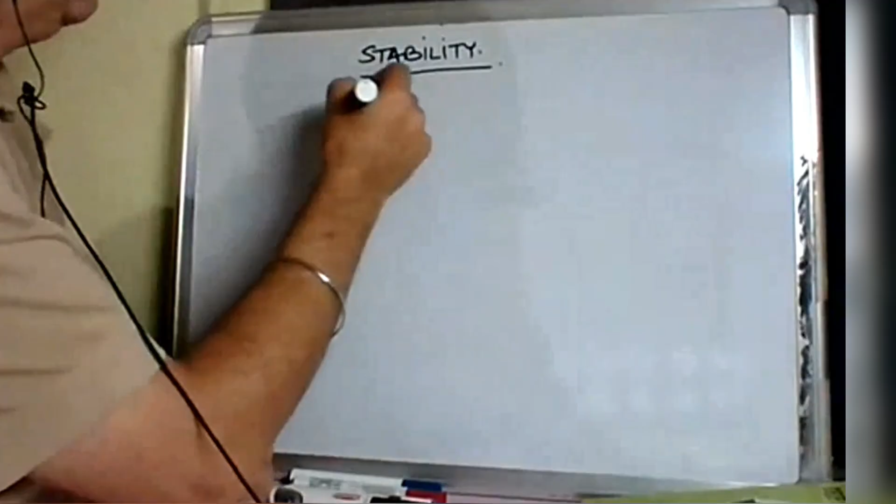These are the topics that I'll be doing with you. So the first big topic that we have will be dry docking, grounding, then trim A. This is from second mates, I'll revise it. Trim A, you will remember this from your second mates. Then we will be going on to Hinship question number 84. Specifically one question. This is a combined list and trim question. It's quite popular and definitely comes. So we'll be doing this. And trim table, trimming tables.

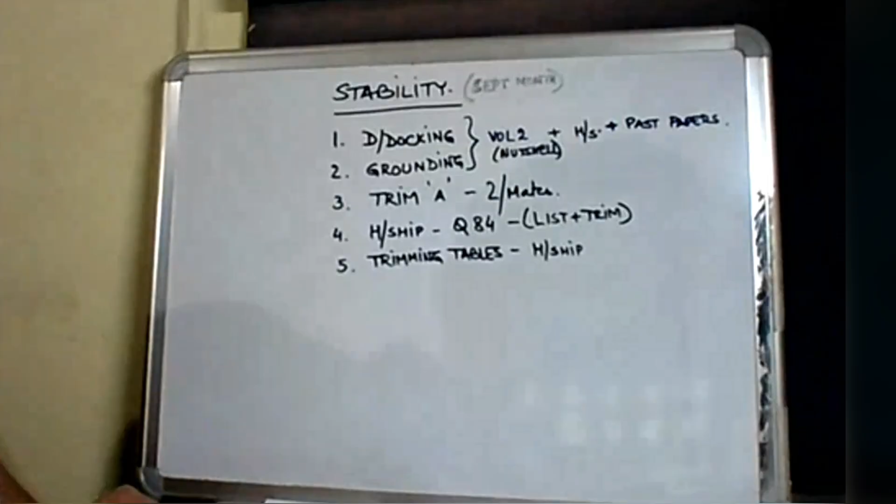All right, let's start with dry docking. So let's make a diagram.

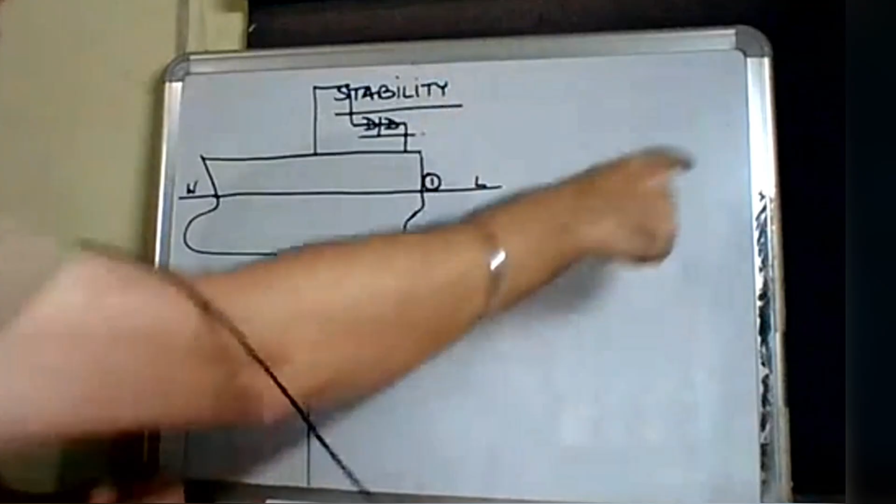Okay sir, we can proceed.

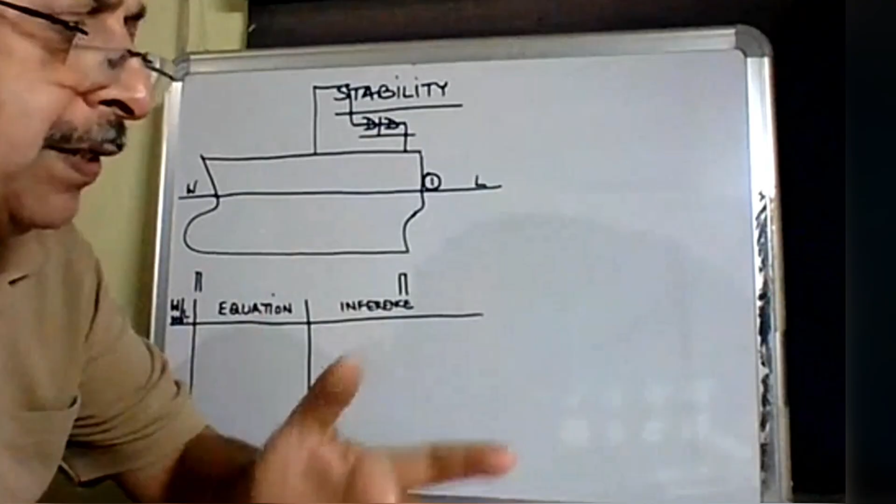Yes, okay. So this begins a good 6 months earlier than the actual dry docking. Prior to the actual dry docking, a series of communication happens between the ship and the dry dock, wherein the dry dock wants the ship to enter in a particular condition with a particular trim, with a particular draft, and the ship has to comply with that. So a series of communication happens between them. The reason for that is because the ship has to be stable at all times, and she should have a positive GM through and through.

Now, there are 2 types of dry dock. One is called a graving dock, that is a cemented structure. The other is called a floating dry dock, where the dry dock itself is a ship, and our ship becomes the cargo of that ship. So we get loaded on board that ship, and therefore the dry dock plus our ship together as a system becomes a floating ship. So that is called a floating dry dock. Graving dock, floating dry dock - one can go into either one depending on the availability.

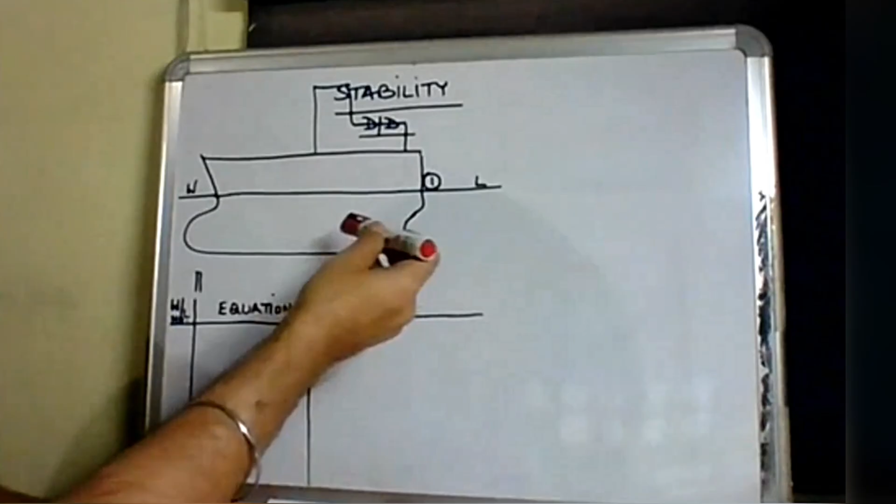Now let us say this vessel has to come into a dry dock. The drafts agreed upon are forward 4 meters, aft 5 meters. So trim is 1 meter by stern. Now the blocks in reality are all along the length of the ship, but we are concerned only about the aftmost block and the forwardmost block for stability calculations.

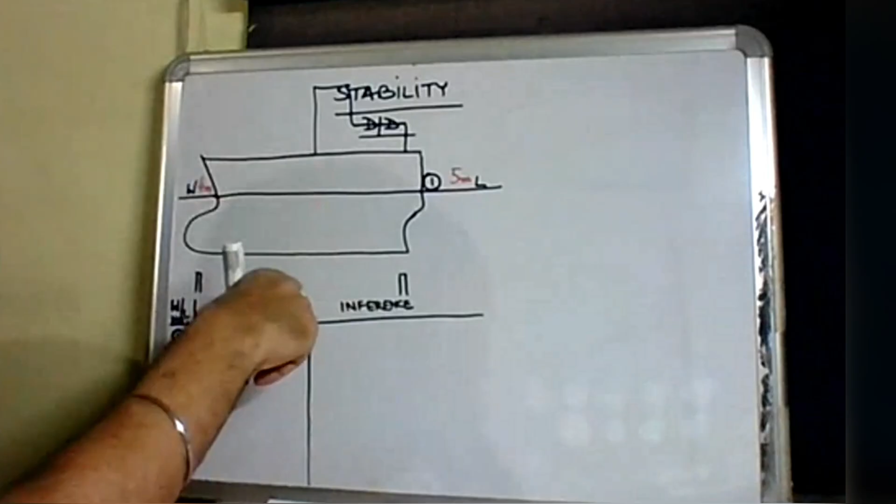In reality there are blocks in between also. So waterline number 1, we are calling this waterline number 1. The displacement W1 is acting downward and the buoyancy is B1 acting upward, and the vessel is afloat. The displacement acting downward through the center of gravity, force of buoyancy equal to W displacement acting vertically upward through the center of buoyancy, and therefore the vessel is in stable equilibrium. Vessel is afloat. Trim is 1 meter by stern.

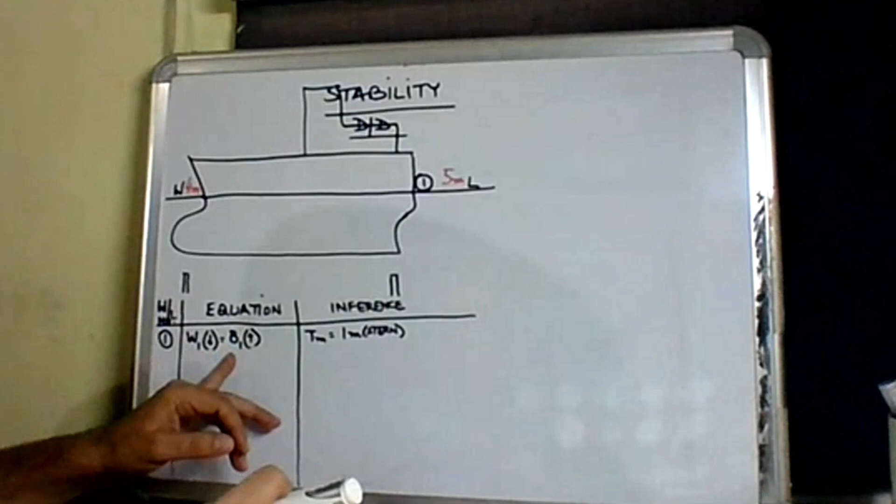One (number) is representing the volume, the waterline. Is that okay? Is it making sense?

What is written in the third column, inference? So what do we infer from this?

Trim is 1 meter by stern. What are our observations? It is floating in the water without touching any block.

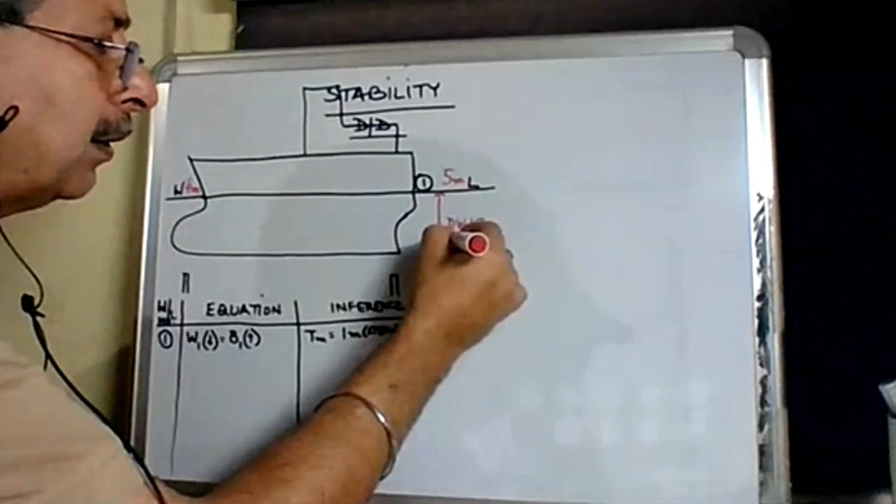Correct. So trim is 1 meter by stern. Now when we enter, there was some dock water height - it is the height from the top of the blocks to the waterline. This is known as dock water height, from the top of the blocks to the waterline. Let us say dock water height is 10 meters. So how much is my UKC? 5 meters. Okay, UKC is 5 meters.

Now the lock gates are closed. Once the vessel is firmly in position, lock gates are closed. And the dry dock begins to pump out the water.

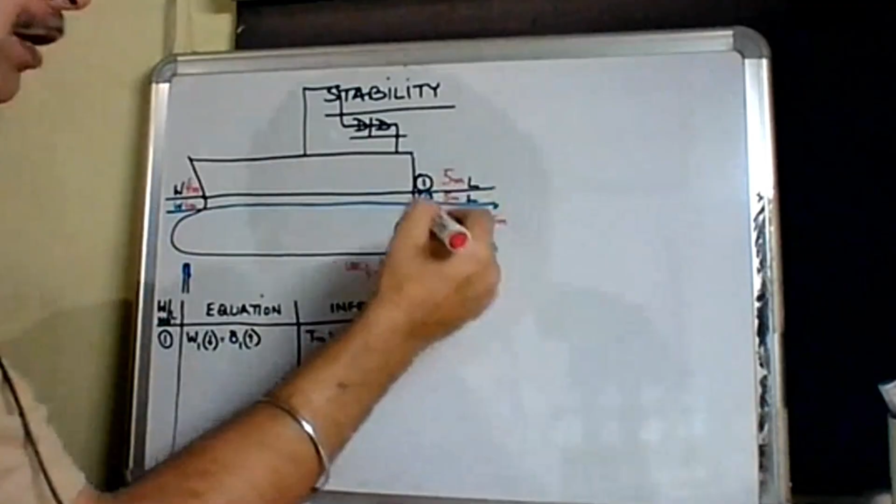P is an upthrust force which is exerted by the aft block onto the hull of the ship. So it is acting at the stern frame, this upthrust force, where the aft block first made contact with the ship. Since P is a force, it is acting in the same direction as buoyancy.

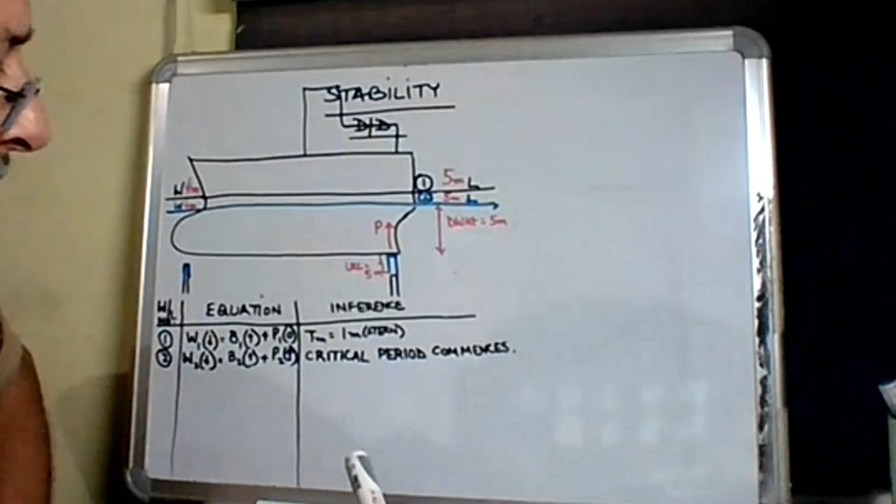So at water line 2, aft touches the block for the first time. So we call water line 2 the point where the critical period commences. Critical period has commenced - meaning as soon as the upthrust force starts acting on the stern, the movement becomes critical. The critical period has commenced.

Is this okay? So when does the critical period commence? When aft has touched the block for the first time - the bottom of the dry dock. When aft has touched the block for the first time.

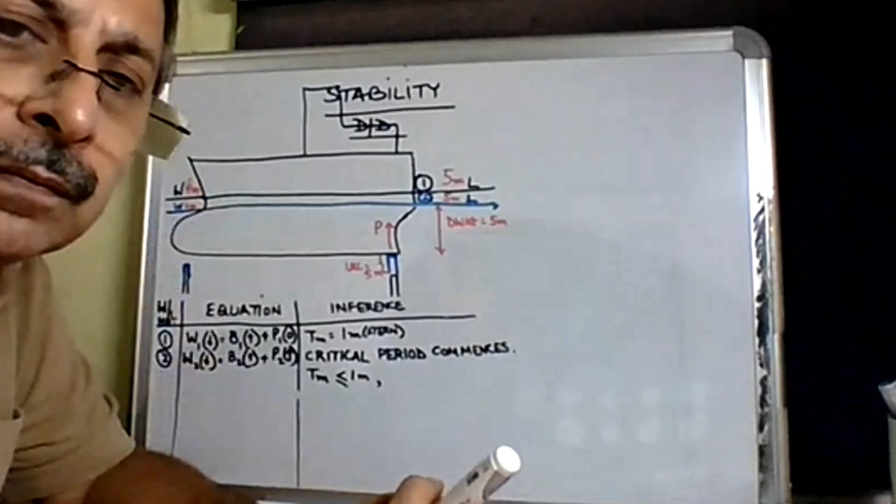So dry docking is a slow progression of transfer of weight of the ship to the block, slowly in a gradual manner. Originally, the entire weight of the ship was taken over by the water. Now, gradually, the ship is transferring the weight onto the blocks in a slow manner by reducing the level of the water. Is that okay?

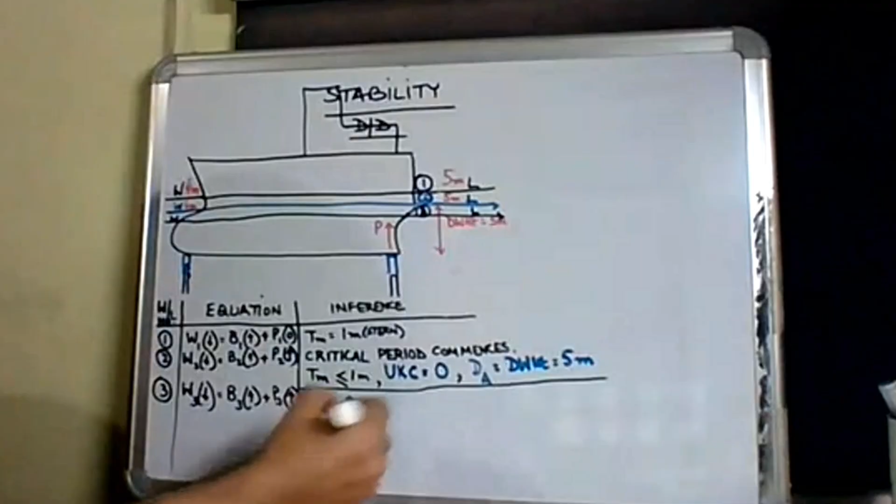What is the trim at this stage? 0, Everybody agrees on it? 0, Okay. What will be the UKC at this stage? सर 0, All right. The draft forward will be equal to draft aft. Do you agree on this? Yes, sir. Okay. This will be equal to dock water height at this stage.

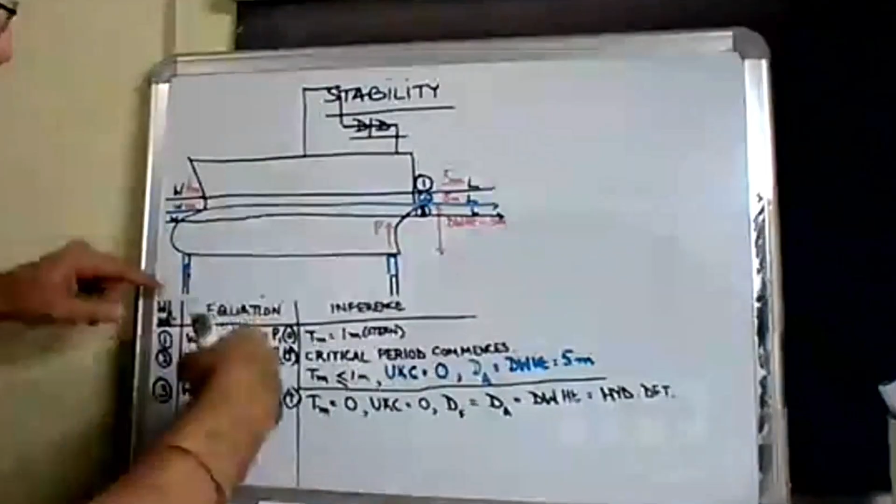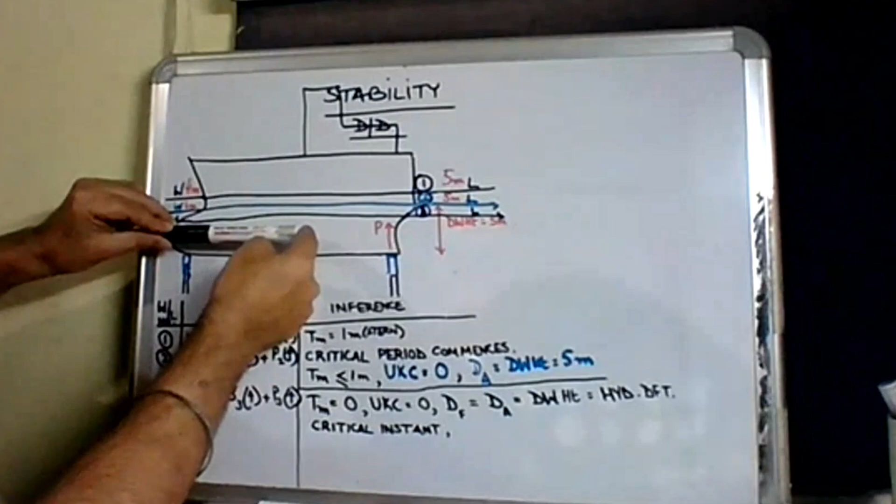Okay, this waterline 3 is known as, when the bow is about to touch the block forward, it is known as the critical instant. The instant at which the bow is about to touch the block forward is known as critical instant.

And the moment the bow has touched down, its critical period ends. So critical instant and critical period ending happen at the same time, all at waterline number 3. But there is a technical difference between the two. The critical instant is a split second before critical period ending.

How do you define critical instant? It is the instant at which the bow is about to touch the block, and the moment the touchdown happens, critical period has ended. Understood? So that means the critical period will be there till the time the bow touches. Absolutely.

It doesn't matter whether it starts touching the other blocks, right? At the end, on the stern, it touches the first block, then gradually it starts touching other blocks before touching the forward one. Till that time also the critical period is there. Correct. So critical period, how do we define? It is the period from when the aft touches the block for the first time to the forward touching the block. That means from waterline 2 to waterline 3.

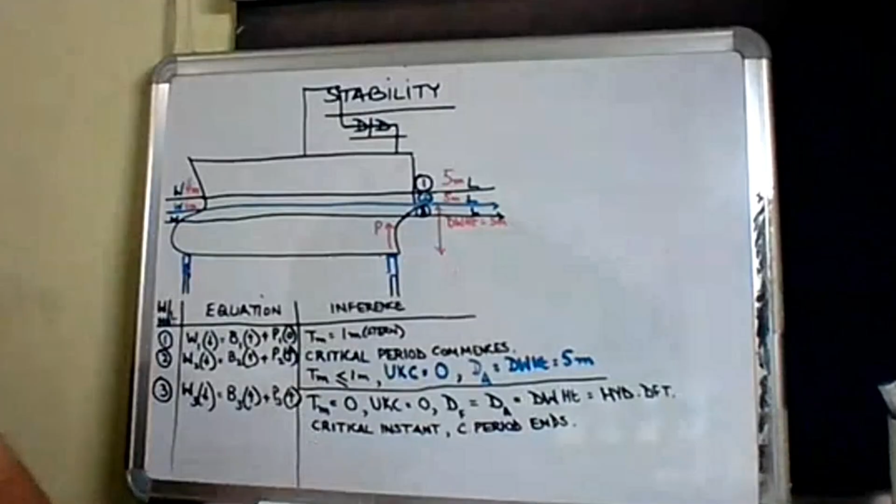Okay? Is the difference between critical instant and critical period clear? Yes, sir. Anybody has any questions on this? So you know the difference between the two? Instant is a split second before critical period ending. Both are happening at waterline number 3.

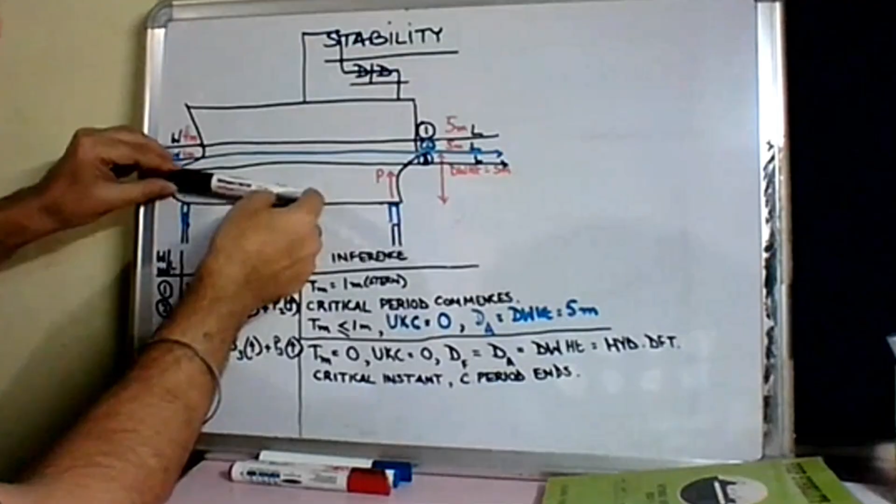Do critical period end and critical instant happen at the same time, or just about when the bow touches the first block? See, critical instant occurs a split second before critical period ending. Both are occurring at waterline number 3. Trim is 0 at that time in both the cases. The only technical difference is critical instant is when the bow is about to touch. Critical period ending is when the bow has touched. That's the difference. Thank you. Yes. Is this okay?

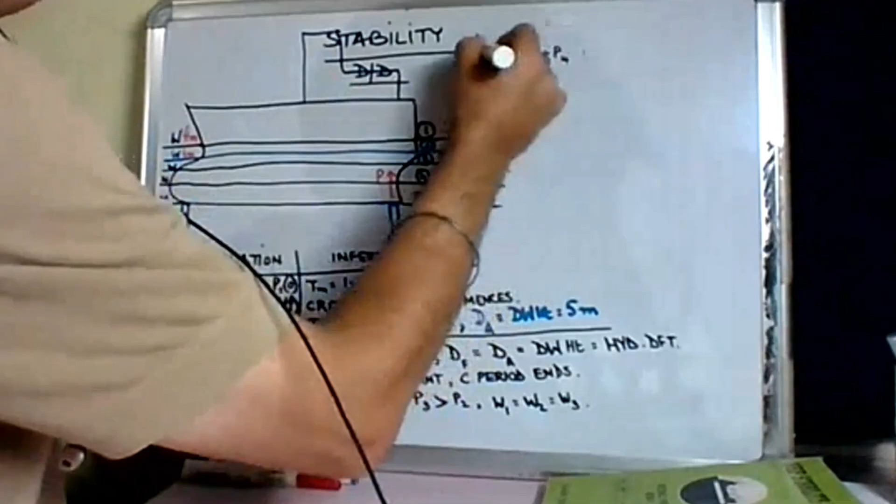W4 is equal to Bravo 4 plus Papa 4. This is waterline number 4. In inference: trim is 0 at that stage. Bravo 4 is less than Bravo 3. Papa 4 is greater than Papa 3. And W3 is equal to W4. Draft forward is equal to draft aft is equal to dock water height is equal to hydrostatic draft. This is waterline number 4.

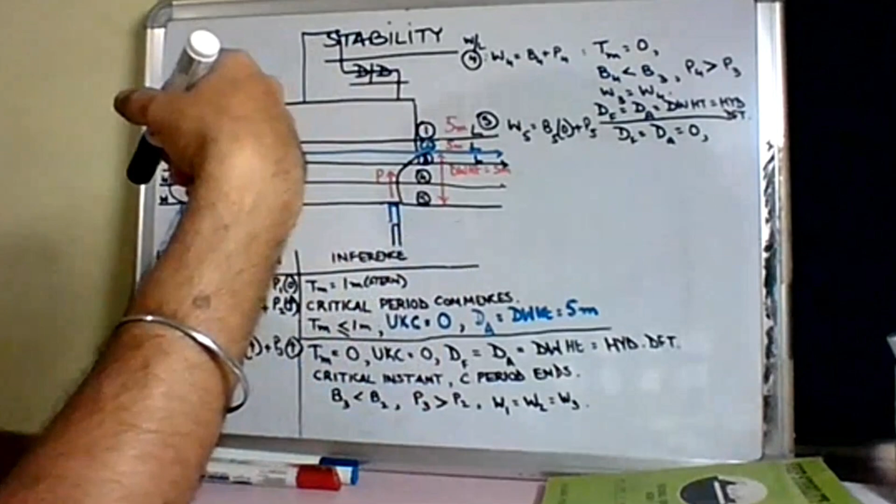Okay. Now a question: why does dry dock stop pumping out water after waterline 3?

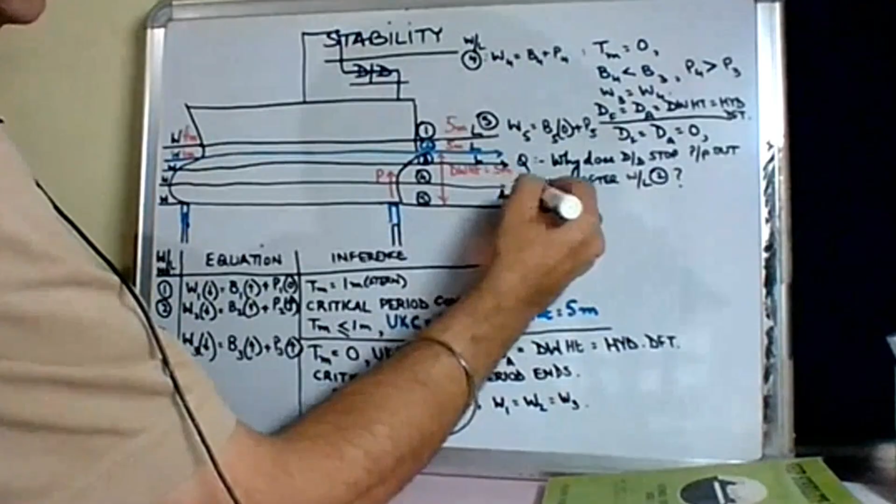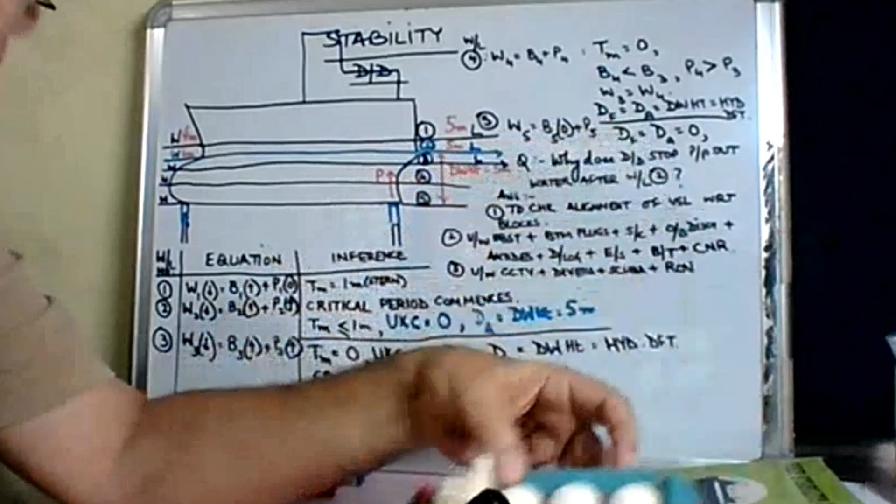Just to confirm that all as per our plan, right sir? Come again. Just to confirm that all sitting as per our plan. The ship is sitting on the block. Correct. To confirm that the ship is sitting on the blocks as per the plan. That is why. Okay? Is that okay? Thank you.

What have you written as the last point of number 3? Underwater CCTV, divers, scuba, and remote operated vehicles or vessels. Okay, thank you. Remote operated vessels. What is scuba? Scuba divers, right. Scuba underwater, you have the submarines also, scuba. You have the divers also, scuba. Okay sir. And the remote operated vehicle.

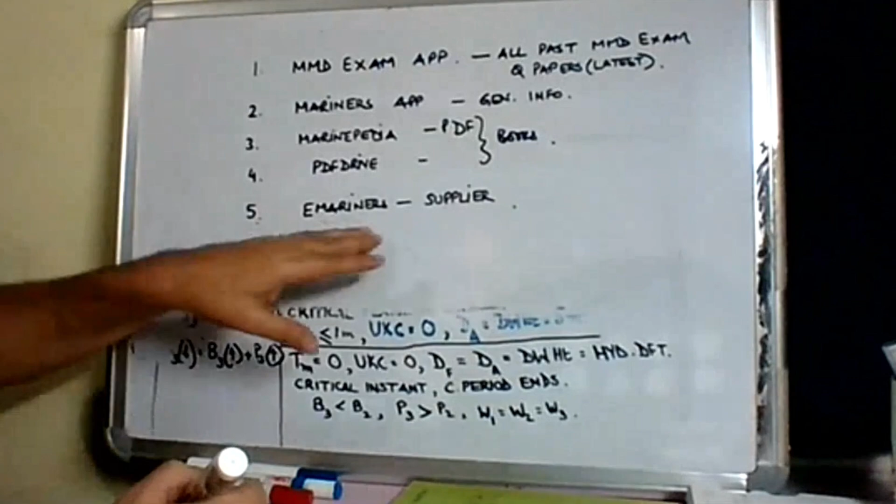So this PDF Drive is a website, right, sir? Correct. Both these are websites. Good. Both these are websites. So on these you will get the books in soft copy.

So basically this will take care of all your requirements. Okay? So go to Nutshell Volume 2, Dry Docking chapter. Okay, I want you to read the theory part of it. The dry docking theory part, just I want you to read the theory. This is chapter number 31 of my book. Chapter number 31, dry docking. I just want you to read only the theory. No numericals to be done.

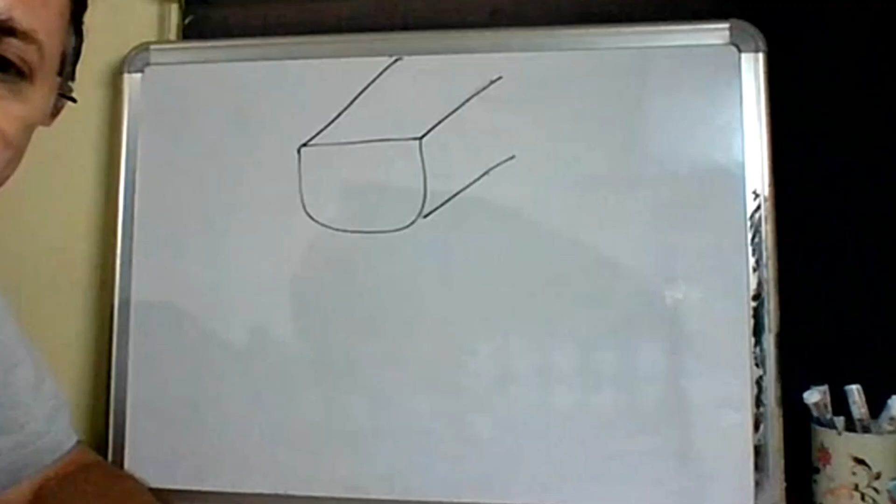Excuse me, sir, I'm not able to see the camera. You're not able to see the camera? What about the others? I just got logged out for two minutes and logged in again. Visible, sir. If you can't see my camera, just leave and log in again. Okay, sir. I also logged out and logged in again, and now it's working fine. Yes, it is now visible, sir.

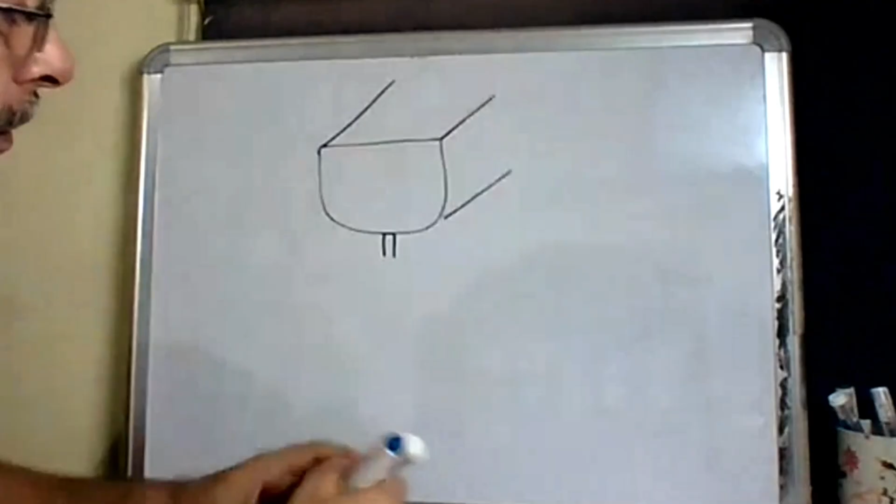Okay. All right. So if this is the athwartship look of the vessel, lengthwise like that, then this is your center, the keel blocks as they're called. They go along the length, right? Then you have side blocks. Because the ship's beam is larger, then you have what are called bilge blocks. So keel blocks, side blocks, bilge blocks.

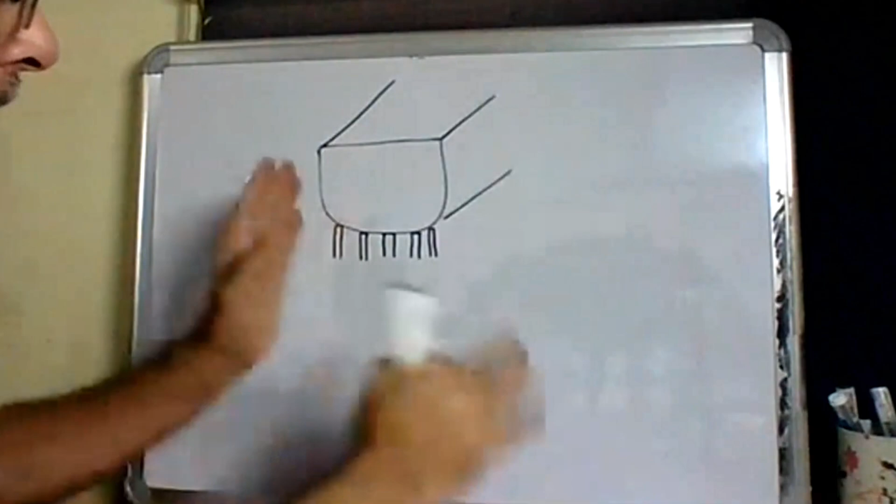Where the curvature of the bilge comes, the outermost ones are called the bilge blocks. These are also all along the length of the ship. They are all going along the length, right? It depends on the beam of the vessel. If the beam is small, side blocks won't be needed. But if the beam is larger, naturally the side blocks will keep increasing.

So that depends totally on the size of the vessel. अच्छा. अब क्या होता है कि because ये P ऐसे act कर रहा है, तो there will be a tendency of the vessel to bulge out like this. There will be a tendency because ये ऐसे push कर रहा है जहाज को, तो there will be a tendency for the vessel to bulge out like this.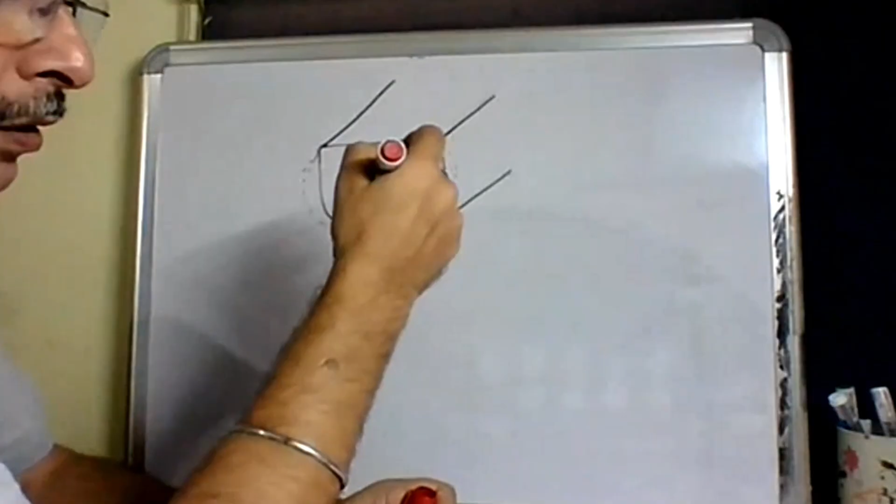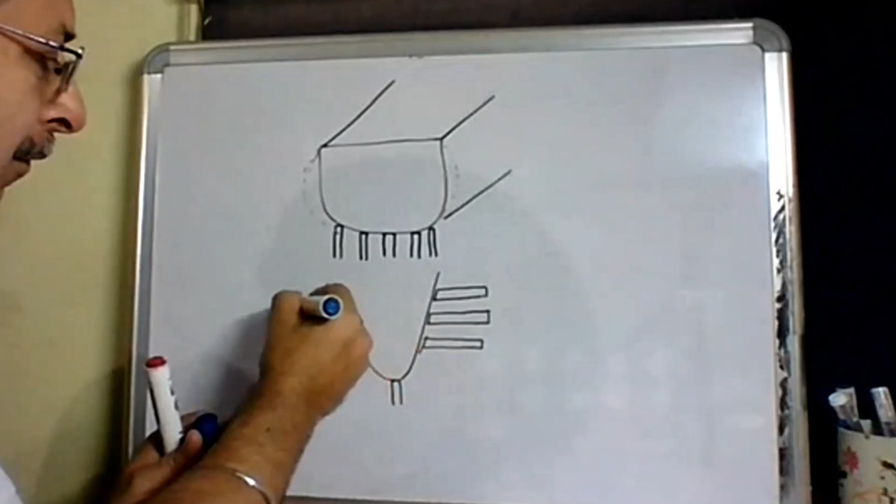So in order to prevent that bulging out, the older vessels, general cargo and all that, used to be V-shaped vessels, not a regular box. The vessels were shaped like this. So if this vessel was V-shaped and she would sit like this, when she sat down, or when she touched waterline 2, these planks of wood were wedged on the sides by the dry dock.

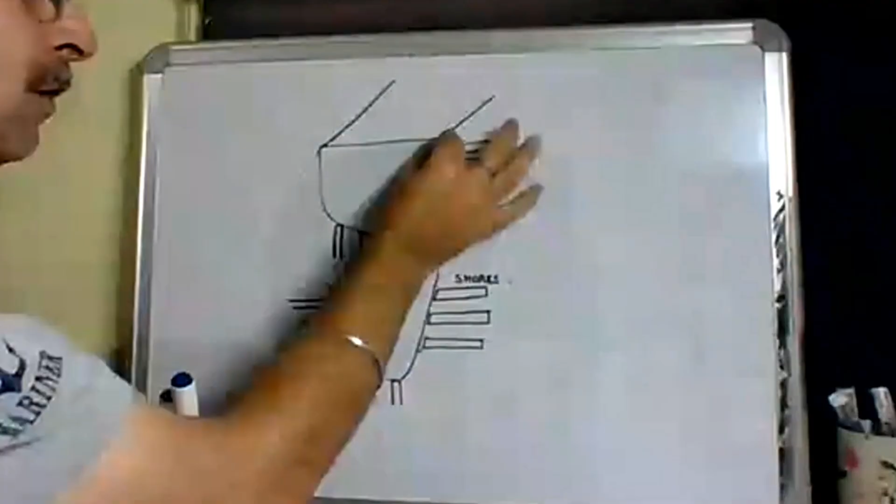So they would do two functions. One, they would wedge the vessel so as to prevent the toppling over. Two, they would prevent the bulging out of the vessel, or what is it called, the bulging out of the plating, the shell plating.

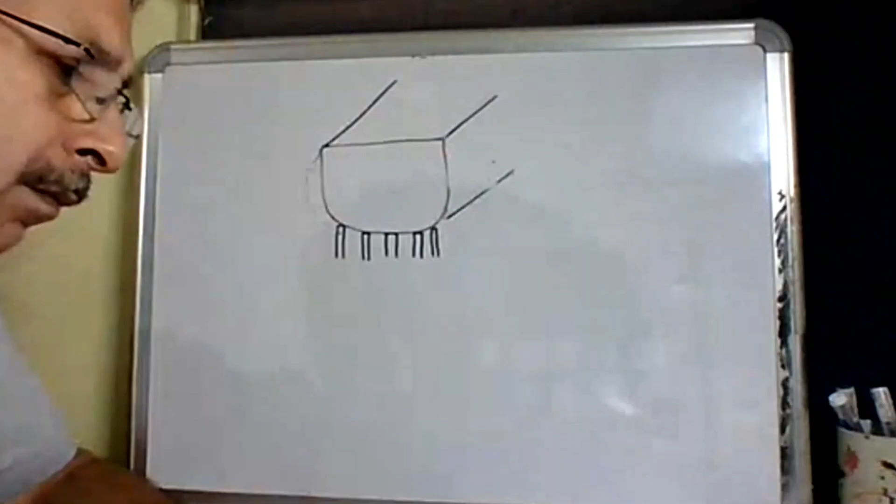So by the blocks itself, you just increase the number of blocks, that's all. So in today's time, this is not done. But yes, you should know what shorings are, because orals में पूछ लेते हैं. How do we prevent bulging in these box-shaped vessels? Bulging out of hull plates.

No, you cannot do anything. Extra paddings on top of these blocks. So Teflon paddings, rubber paddings, highly reinforced rubber paddings are put up over here. So they take care of that bulging out. Vessels used to dry dock for a very long period of time. एक बारी dry dock में जाता था जहाज, तो 3-4 महीने के लिए जाता था. The dry docks were not so efficient as today. So having a prolonged stay in dry dock on the blocks, she is more susceptible to this bulging out.

But today our dry docks are minimized. Bulk of the job is done at the repair berth, which is floating. So first we go to the repair jetty. The work there starts, the engines are opened up, the units are opened up, and we go into the dry dock only for the underwater portion, nothing else. So in reality, the dry dock stay might be just 10 or 12 days. The repair berth stay might be 15 to 18 days. In totality the repair becomes about a month. So as a result, the bulging is less. The vessel is exposed for less period on the blocks. That is the situation today. Okay, sir.

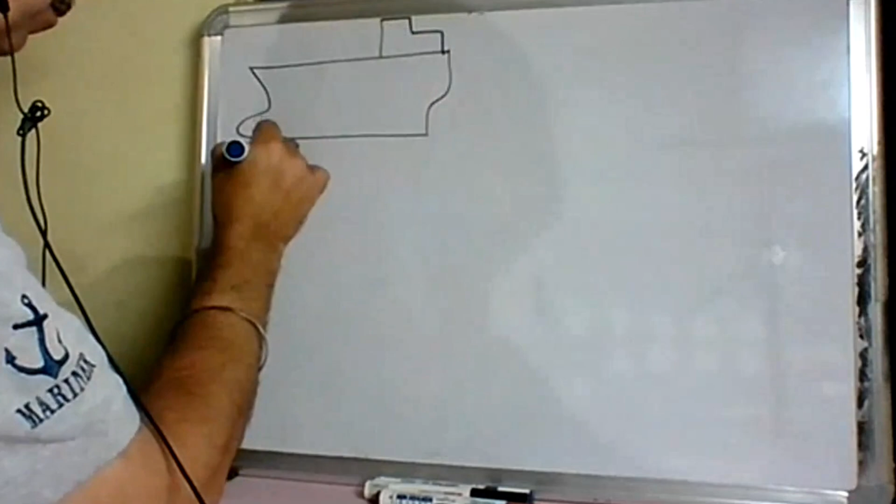So that was that with regards to the shoring. Okay, now let us start. Which waterline is this? What number shall I give it? This one is number 3, sir. Number 3, touching both, no? Does everybody agree on that? This cannot be 1. It cannot be 2 also. Agreed? Yes, sir. This is 3. That means इससे पहले number 2 हो चुकी है और उससे पहले number 1. So 1 से मैं 2 पे आया, 2 से मैं 3 पे आया.

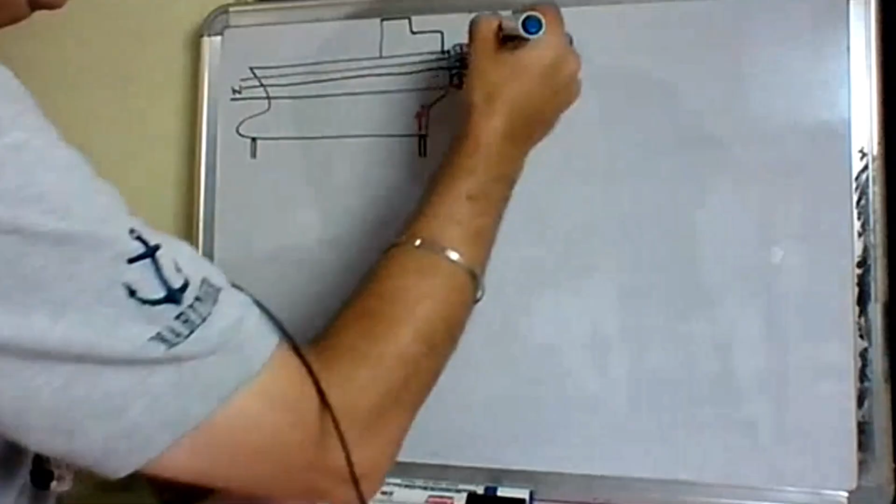So now let me touch upon one more element of the stability, and that is GM. So let's say that at waterline number 1, the KM of the vessel is 6 meters, the KG of the vessel is 5 meters. Therefore the initial GM is 1 meter.

So at waterline 1, under the column of inference, write down GM initial is equal to 1 meter. These are hypothetical values, I'm just randomly taking some values to explain a point.

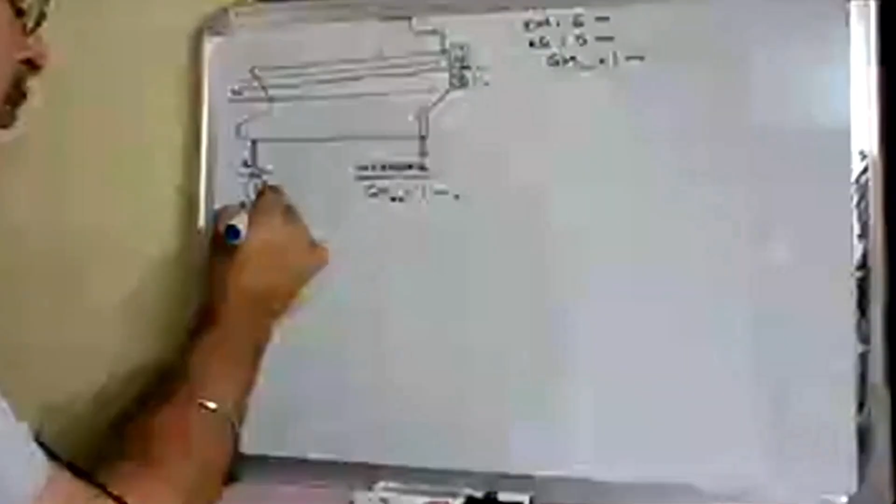Now, when I come to waterline number 2, P will start to act. Will there be any change in the GM of the vessel? Is the question. What do you think? Sir, repeat please.

What I'm saying is, at waterline 2, when P begins to act, aft side touches the block. The kg will change, so GM will be affected. Now the question is like this: in reality, the kg of the vessel does not change.

Because the displacement of the vessel is 50,000 tons, and if the displacement is constant, then kg is also constant. Yes sir, it will be constant. That is right, correct sir.

Now what happens is this P tons of force which is acting upward is changing the trim of the vessel. And since the trim is changing, the waterline is changing. Earlier the waterline was inclined like this, now the waterline is slowly becoming less inclined and coming to even keel.

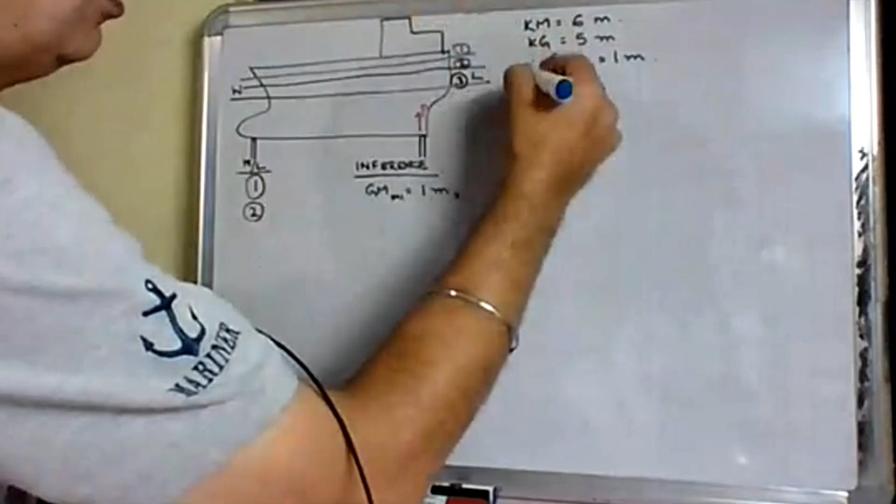As a result, Km is also equal to Kb plus Bm. So my waterline is changing, so Kb is changing, Bm is also changing, so Km is changing. If Km is changing, Kg remaining constant, that means Gm is changing and Gm is reducing. Yes sir, correct. Sir please repeat again.

I'll repeat once again. Km is also equal to Kb plus Bm. My waterline is changing. My waterline was initially inclined like this.

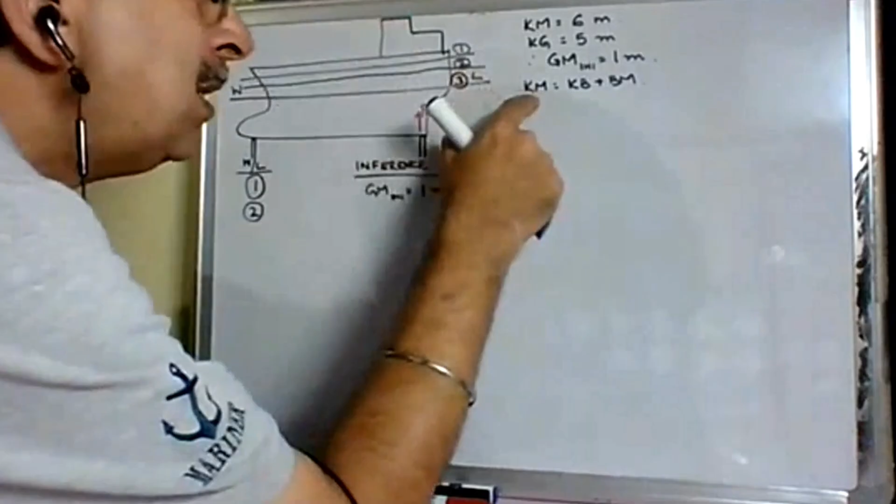Excuse me sir, let me just finish the sentence. So because my Km is changing, my Gm is also changing because of that.

Kg is constant, so because my Gm is changing, this actually reduces my Gm. This reduction of Gm is called as virtual loss of Gm. And so therefore from waterline number 2 onwards, when the critical period commences, virtual loss of GM commences.

Now you ask me the question, why is the kg constant? At the aft edge, as the ship touches, it will slowly come down towards the forward block. So is there a G shift now from aft towards the center.

What is kg by definition? What is G? G is the center of gravity. By definition, it is called as the geometric center of the mass or weight of the vessel. I have not changed any mass distribution of the vessel.

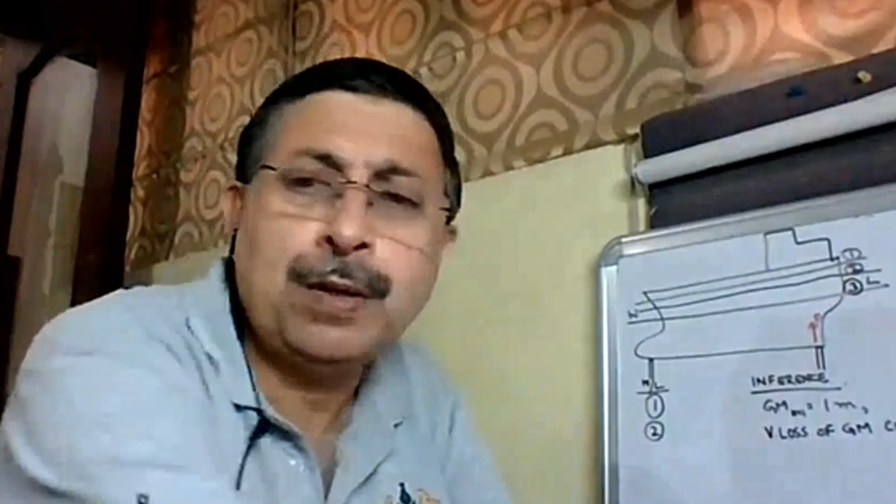So we know of virtual loss of GM occurring due to free surface. Any other instance of virtual loss of GM you know? By loading heavy lifts. Loading heavy lifts.

While loading any lift, any cargo, crane operation, derrick operation, the moment you plumb the cargo, the G shifts to the crane head or derrick head. The G of the weight shifts to the crane. So a virtual loss of GM occurs during that transition period while the crane is swinging the weight and picking it up from the jetty to the place where it is going to land in the hold.

That's called a virtual loss of GM. The weight is still on board, actually on board, but it is in transit the moment the crane has picked it up. The G is getting transferred from the jetty to the weight, then to the crane head, and from the crane head, when it is put into the hold, the weight goes down and the G goes down to the weight. So all this transition is happening. This is virtual loss of GM, correct? Yes sir, so all these are virtual loss of GM. So this is another virtual loss of GM. Okay, is that okay?

Yes sir. So at waterline 2, write down virtual loss of GM commences. The GM will constantly keep losing. Therefore the GM which is remaining will keep on reducing. So the residual GM will decrease. Do you agree to this statement?

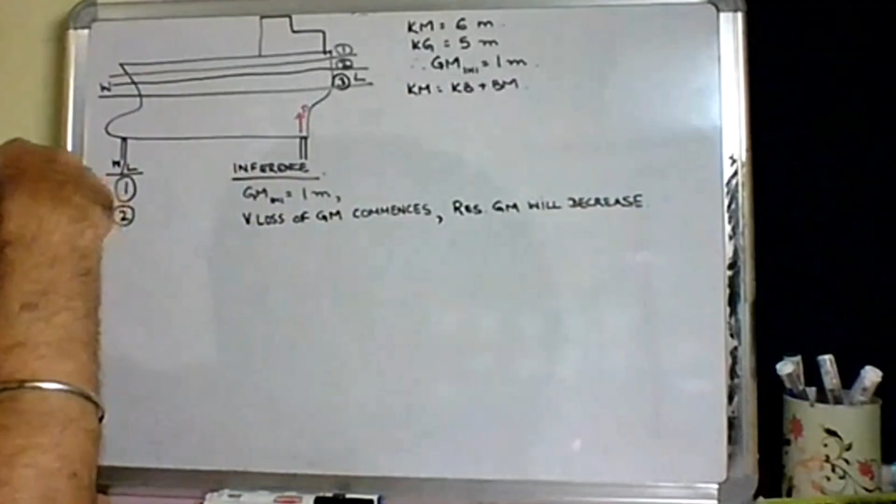Yes sir. Okay, now as the waterline falls, P will increase. The virtual loss of GM will increase. And if virtual loss of GM increases, the remaining residual GM will keep decreasing. Agreed? Yes sir.

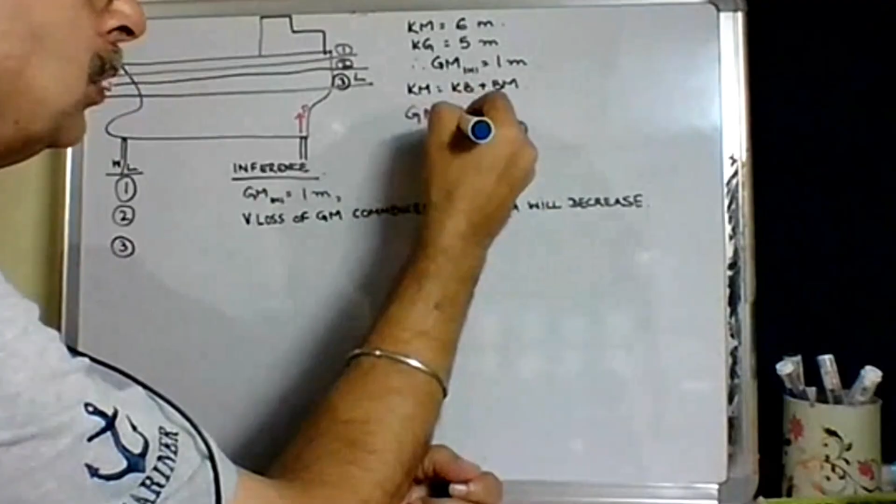Okay, so this residual GM, go ahead. Sir, what is this residue? I didn't get it, residual. So GM initial, supposing, minus the virtual loss, will give me the remaining GM, the residual GM. Oh okay sir, so if my initial GM is 1 meter, supposing my virtual loss of GM is 0.25 meter, then what is my remaining GM?

0.75. Supposing my GM initial is 1 meter, my virtual loss of GM is 1.25 meters. What is my residual GM? Minus 0.25. Yeah, agreed on this? Yes sir.

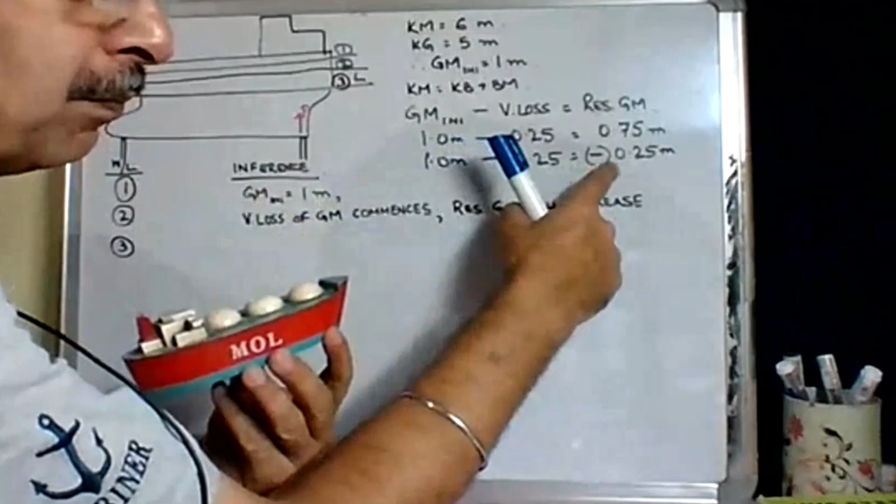What will be my situation at this time? I am aft, touched, forward not yet touched, still in the air, and I have got a negative GM. I am unstable. What will happen? The vessel will topple over. Agreed? Yes sir. This is the criticality of the critical period.

I don't want this to happen. Hence the name critical period. When does critical period occur? From 2 to 3. Yes sir. So I don't want my residual GM to become negative between 2 and 3. Yes sir. So what do I want? At waterline 3, my residual GM should be positive.

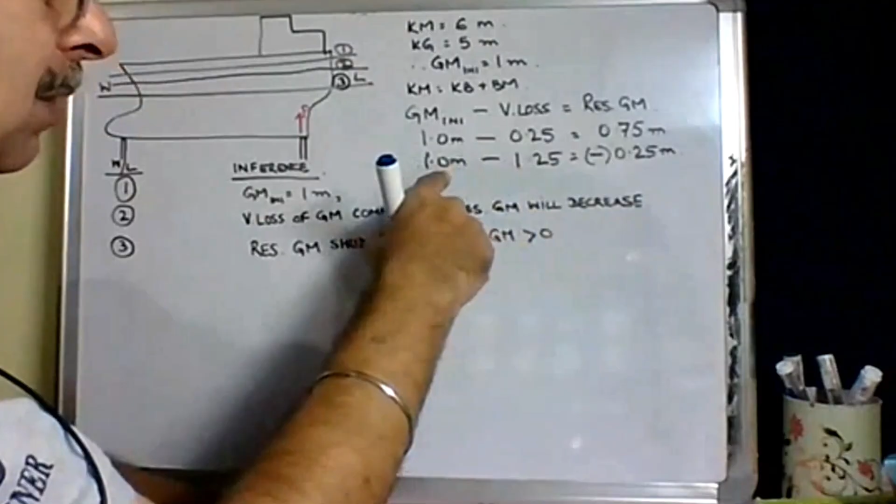That means my residual GM should be greater than 0. That is what I want. If my residual GM, I want it to be greater than 0, that means I want it to be stable. I want this to be positive. My virtual loss should be less than GM initial. That means my virtual loss should be less than 1 meter. So long as my virtual loss is less than 1 meter, my residual GM will always be positive.

Yes sir. Since my residual GM is always positive at waterline 3, I'm okay to dry dock. Yes sir. So at waterline 3, my RGM or residual GM should be positive. This is one of my conditions. So this is the biggest challenge for the mate, to check RGM at waterline 3. If this is positive, it's okay to dry dock, no problem. Is it okay? Yes sir.

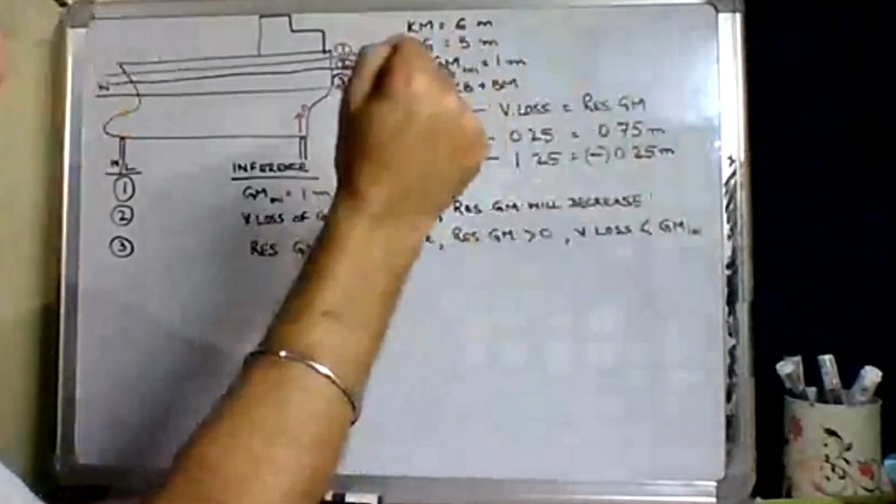So at waterline number 4, the residual GM will become equal to 0. Virtual loss of GM will be equal to GM initial. Supposing 1 meter, then 1 meter. Is it okay? Sir, please explain number 4 again. Number 4 again, okay.

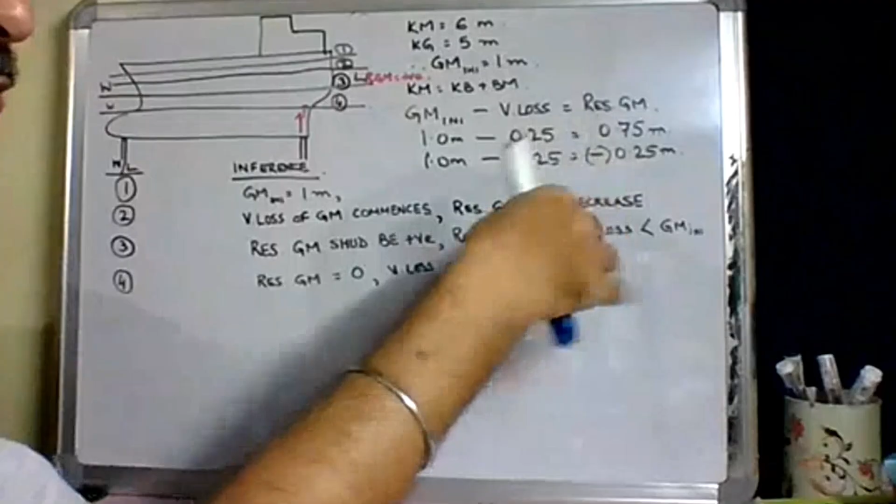That means the virtual loss of GM is equal to the initial GM. Virtual loss is equal to initial GM, which was 1 meter, so virtual loss is also 1. RGM is 0. This will be waterline number 4.

Sir, at number 4, have all blocks already touched or not yet? Already touched, they touched at 3. P has increased, waterline 4, P4 is greater than P3. Bravo 4 is less than Bravo 3. Trim is 0, that already happened earlier.

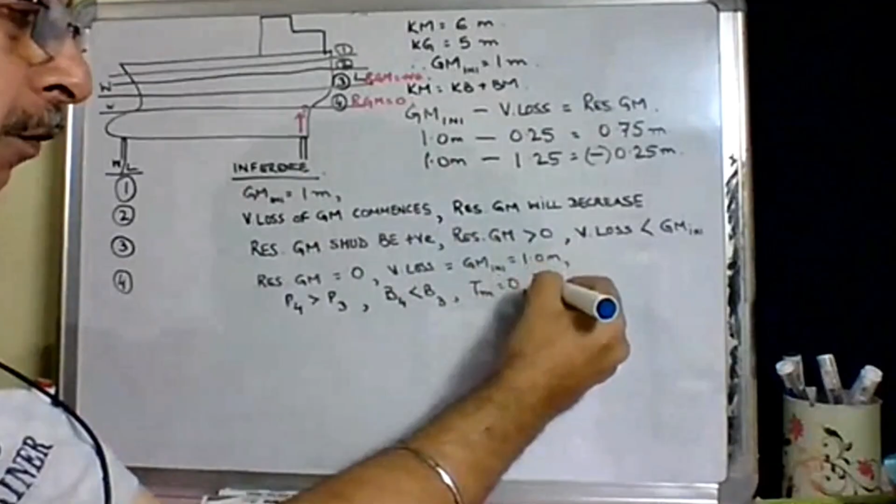Draft forward will be equal to draft aft, will be equal to dock water height, will be equal to hydrostatic draft. If I get any one of these, I get all the rest. Displacement remaining constant, W4 is equal to W3 is equal to W2 is equal to W1. Displacement throughout this entire process is constant. Kg is constant, not changing.

Is this okay? Yes sir. Any doubts up to waterline 4? No sir, okay. Now after this, the dry dock pumps out water.

As soon as water goes below waterline 4, virtual loss will increase, RGM will become negative. Yes sir, correct. So she'll become unstable. Yes sir, but she's already sitting all over on the blocks. So it is okay, she won't topple over. This is what we wanted to achieve - we wanted her to be sitting all over on the blocks when the GM becomes negative.

We wanted to achieve that. So sir, at number 4 it is sitting on all the blocks. Correct, so GM was positive, so we were already in a safe position before. Yes, it started from 3 itself, we had come to safe. I wanted to achieve 3 first, at 3 it had become positive, I was okay. So this is the sequence of my dry docking - I should go from 1 to 2 to 3 to 4 to 5.

So after 4, the GM will become negative. RGM will remain negative, and as the waterline keeps falling, it will become more negative. My question to you is...

What will be what sir? Sir, it will be negative. My question is, at waterline 5, what will be the RGM? RGM at waterline 5 will be negative, sir, RGM is negative there already.

Sir, it will be same as kg initial, but negative. Initial 5 meters, this will already be removed because everything is out, water is out, everything is out. So what will happen, minus 5 meters sir? No, something else - so at waterline 5, there is no buoyancy, it will be 0. Since there is no buoyancy, M vanishes, M will vanish, so therefore GM vanishes.

Vessel will only have kg. Did this make sense? Yes sir. So it is like this vessel lying on this table like this. That's all, this vessel has a certain kg right now. Okay, I put this in the water.

It will have a km also, and therefore this vessel will have a GM. I take it out of the water, she doesn't have any GM, because there is no km. I put this on the table, it only has kg now. Okay? Is that okay? Yeah, this is okay sir. Yes, now any doubts?

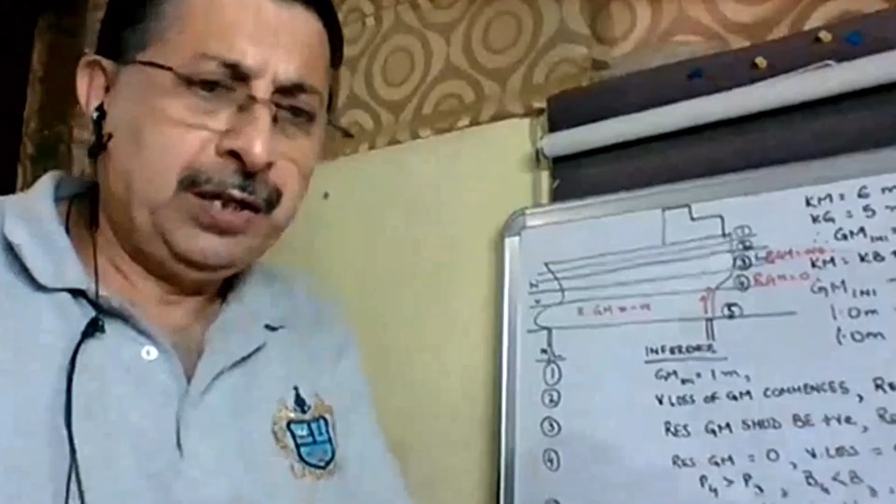Sir, again, if we start filling water at dry docking, after dry dock, so again it will start from negative, go to positive. Absolutely right.

Now reverse - when we do flooding, when we sail out, what will happen first? Waterline 5 will come, then it will be negative, then 4 will come, at 4 RGM will be 0, then after 4 water will rise, GM will become positive, waterline 3 will come, and the bow will be about to lift off. And as soon as it lifts off, trim will keep increasing, and a time will come when the aft is also about to lift off, then waterline 2 will come, and then 1, and then the vessel will sail out. Therefore, we do not carry out any bunkering or fresh water intake or anything inside the dry dock.

We always do it at the anchorage. Why? Because in whatever condition, whatever trim I went in with, I will come out in the same condition, so that the critical period remains the same. That is the reason. Okay sir.

Sir, this number 5 you mentioned, KM, so GM also vanished. So GM is completely reliant on the KM only. That's right. So long as you have an M, and the M is only there for floating bodies. Yes, that's why GM is appearing, because of the M only.

Correct. Sir, regarding bunkering, you just said that we don't take any bunker. Sometimes we go in a dry dock with the minimum ballast. The vessel requires some minimum ballast, so we go in the dry dock with that much amount of water, and that much we also drain because all the tanks are inspected. So is it required that while coming out also we should have that much amount of ballast?

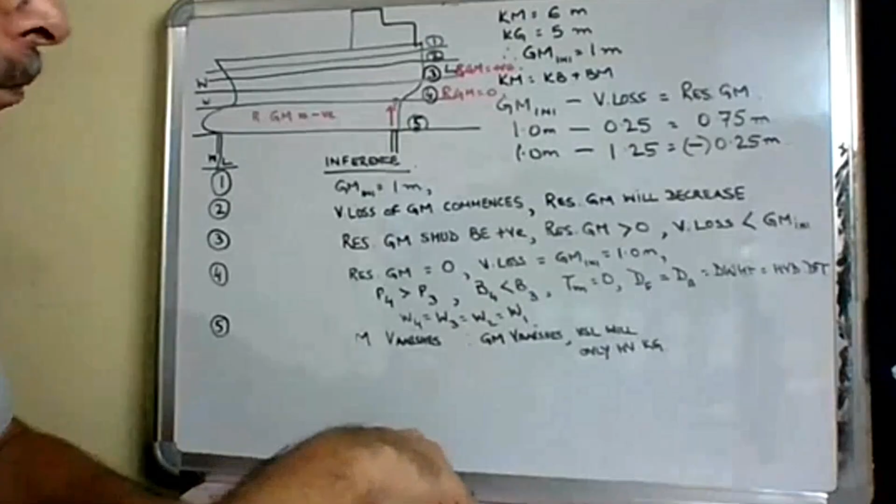Because KB plus BM is equal to KM. So KM will change. KG is constant. So GM will change. That is the virtual loss of GM. Okay, thank you, sir. Sir, at point 3, we have to keep this GM positive.